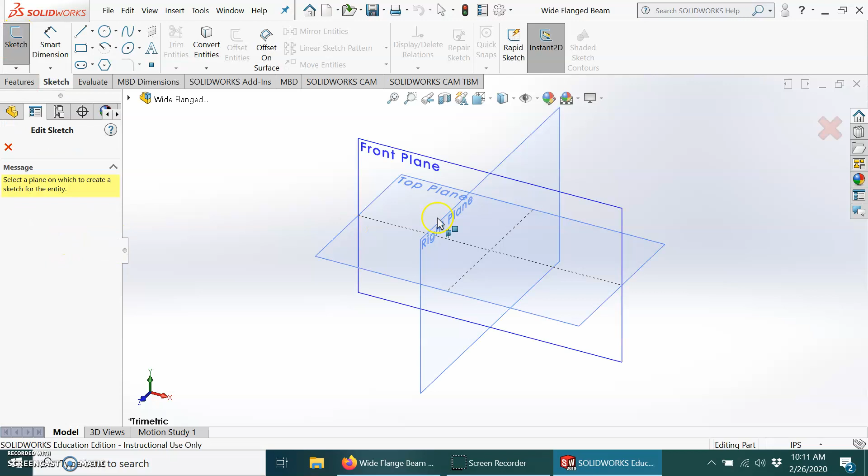I'm going to do this on the front plane. Now, I do want to make it completely symmetrical about everything, the X, Y, and the Z. We'll accomplish the Z by the way that we extrude it out. But since we are centering everything up on the X and the Y, I'm going to use our center lines.

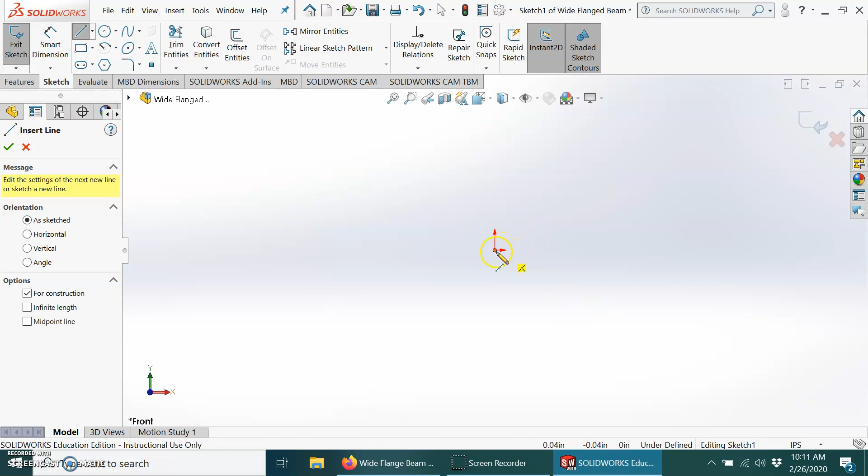I'm going to tag them to the origin. I get my horizontal one there, tag it to the origin, and now I've got a vertical one there. Now you see that I've held up that line to that little yellow vertical appeared, so that would automatically put the relation in, so I don't have to worry about it. So there we go. So we have our center lines, which are construction lines.

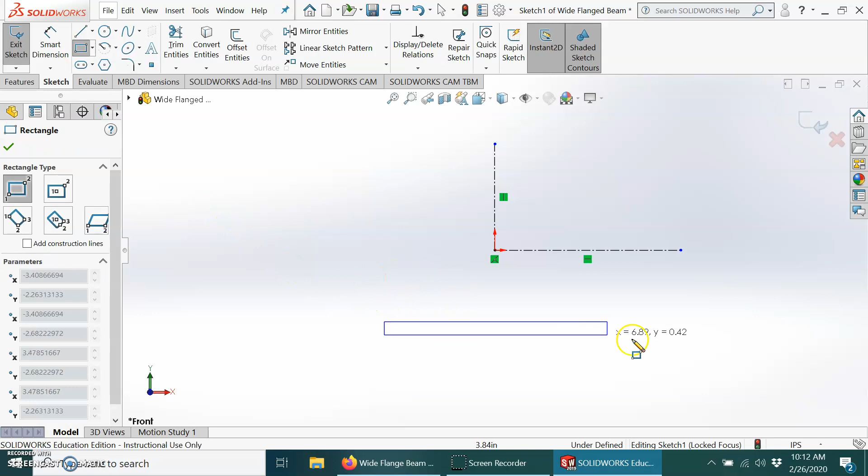So now what I want to do is build my beam. We know what a beam looks like, it's an I-beam. So what I'm going to do is draw 3 rectangles, and then we'll end up putting them together. Now notice I'm not spending too much time to really make it look like what it is, I'm just slapping down some geometry because I know that's kind of what an I-beam looks like.

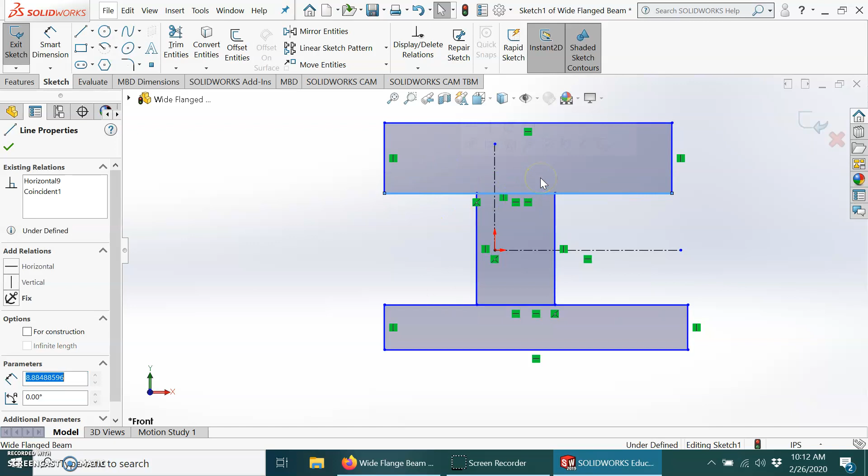From there, we're going to start constraining this guy. But one of the things I do want to do is make this just one cross section through here. So right now everything is tagged together, so it moves around. I do have this line through here. SolidWorks will allow you to extrude multiple sections now, that's not always been the case, but let's just turn this into one section.

The way that we do that is we have trim. Trim allows you to take out lines, trim to closest, trim away from outside. You have a bunch of different options here. I'm just going to go through the power trim, and basically draw a line straight through here, so what I'm doing is cutting this open.

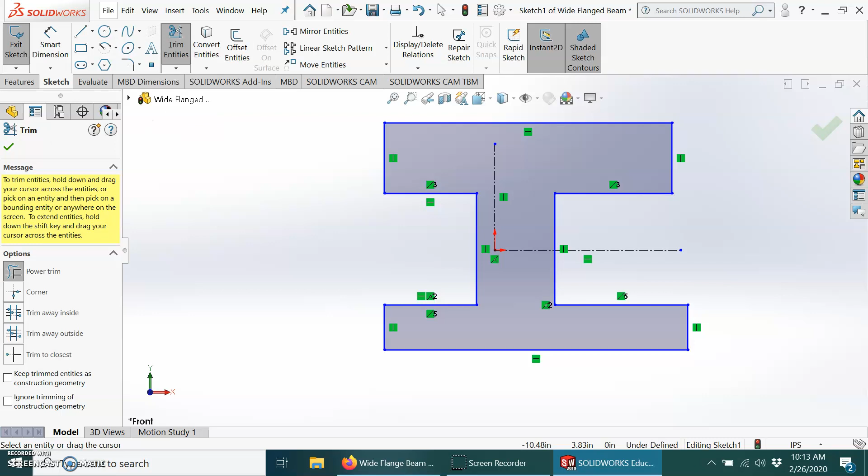Now, did you notice how it went from gray and went to white for a second? That's because I did not have an enclosed cross section, because I still had this little line here. And then when I got rid of that, it went back to gray. That means, okay, well, now I can extrude this because it's a closed section.

So let's start adding some of our constraints here. I'm going to play with one that we had before, and we're going to go right back to symmetry because that's a great one. So I'm going to make things symmetrical about these axes that I drew. As I said, we are going to be using symmetry a lot in this model anyway. Okay, so now everything's symmetrical about those points.

These outside ones need to be symmetrical about the center too. So we're going to pick those lines, pick that, and then make those all symmetrical. Now I could make these ones down here symmetrical about it if we wanted to have a different size beam, but the I-beams, they're going to be the same.

So what I want to do is we're going to take these 2 lines and make those collinear. Notice I got that dashed line in there, all that's doing is saying this is all the same line, we're only using 2 parts of it. And then we'll do the same thing on the other side, make it collinear.

Notice we're doing all of this before I even put dimensions in, because I want to have it set up to where then I can just slap the dimensions on and be done with it.

Okay, so another one that I'm going to put is this line here and this line here. I want them to always remain the same distance from the same thickness. I'm going to put the equal constraint on those, and that's going to make those completely equal.

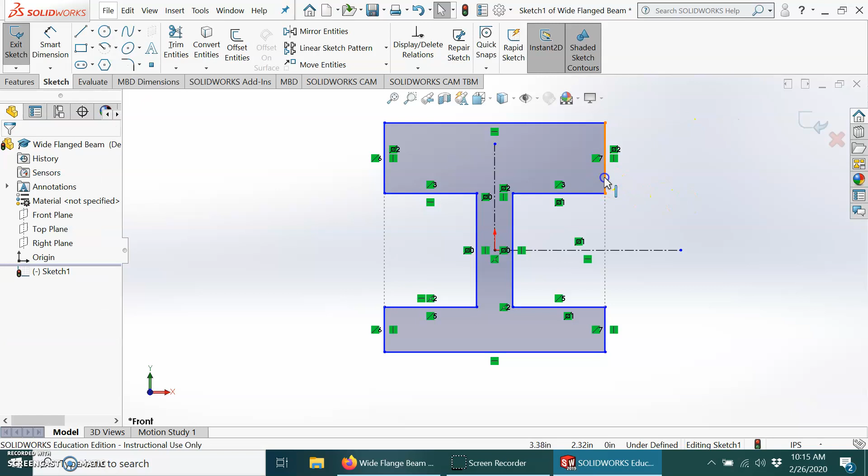Should have changed already. I don't know, do I have that over constrained? Let's go take a look at that. So we've got this line here, this line here.

Oh, I guess I did not click on that. So now I've made those equal, so those will stay the same size. I don't have to do that to these two lines because they're bounded by the collinearities of the other sections.

I believe that is all the constraints we are going to need. Obviously we're still unbounded, so we have to start adding some dimensions into that. Let's take a look, and I've got to look at which beam we're going to make here. We're going to make a W8 by 31.

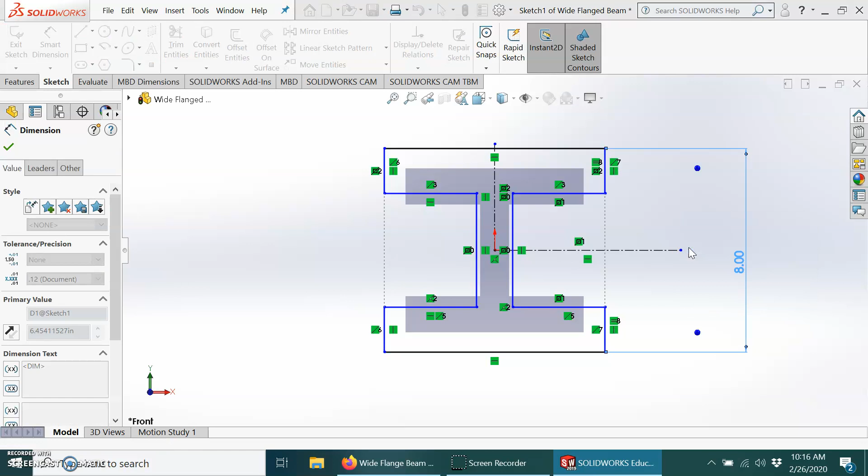So dimension D, which is top to bottom, that needs to be 8 inches. Notice part of it went black because it's fully constrained. So the flange width is 7.995, from here to here.

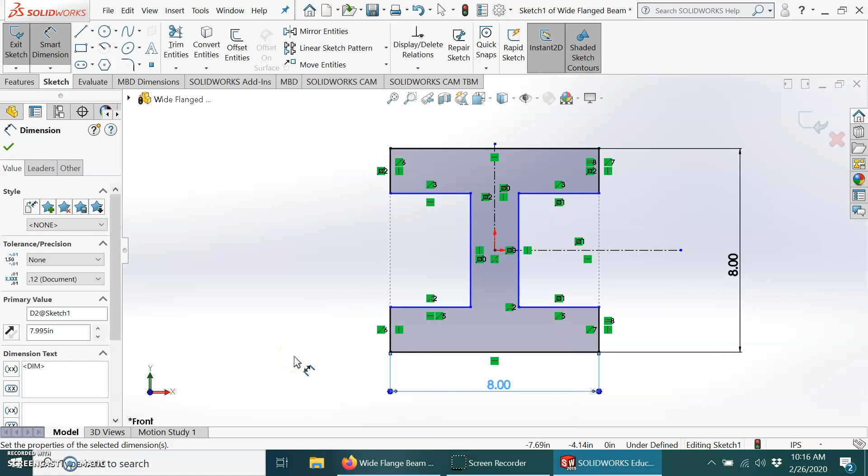It comes up 7.995, and you can see that things are starting to come to shape. Flange thickness is this guy right here. So now we are looking at 0.435.

Notice we've only got one dimension that is not fully constrained, and it's this one here. That would be our web thickness, which is 0.285.

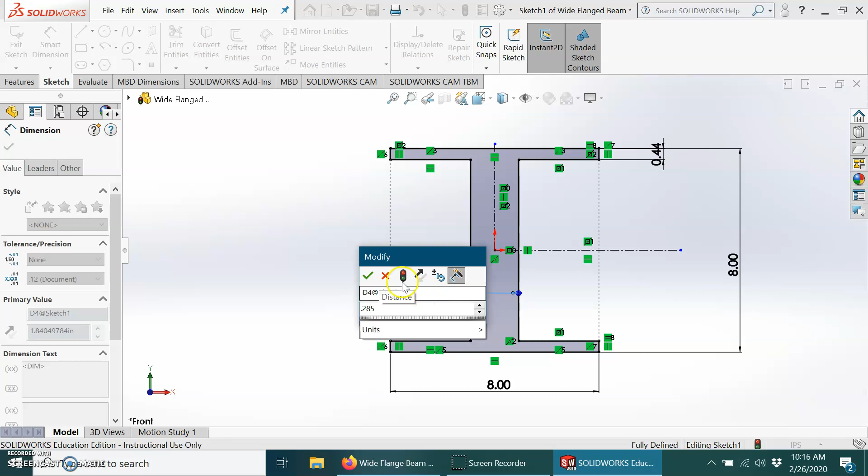So there we go, we have our I-beam there. 4 dimensions completely defines our beam, so everything's taken care of there. And what we need to do now is extrude it.

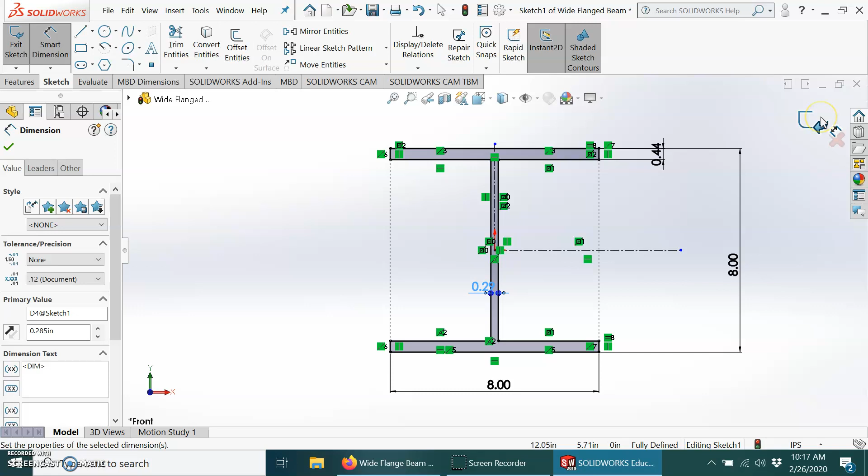Our sketch is done. I'm going to hit here to exit the sketch, complete the sketch. There's our beam. So let's go to features, and we're going to extrude this out. Notice we've only got the one section there. SolidWorks goes, okay, this is the only thing we've got. Now we're going to make it 12 inches deep.

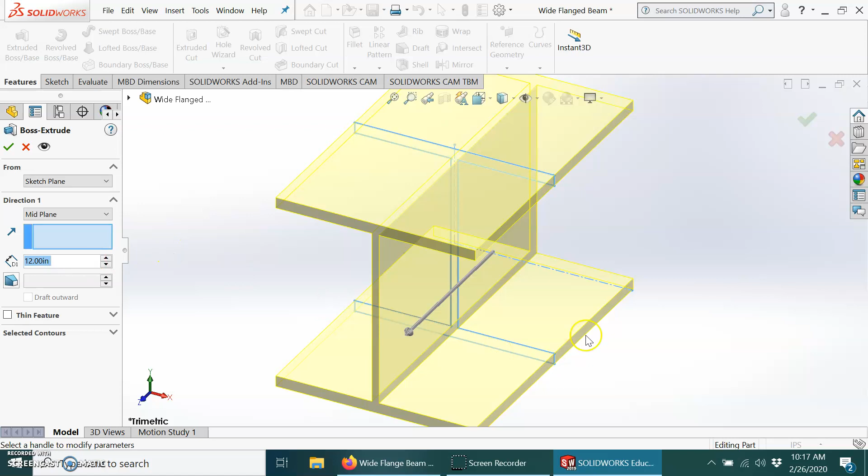As I said, we want to exploit symmetry here. So instead of blind, we're going to do midplane. All midplane does is extrude it out 12 inches, but from the middle, so it's almost like extruding it out 6 inches from each side. You'd get the same effect if you went 6 inches one way and then did a second direction 6 inches the other way, but we're just doing it from the midplane.

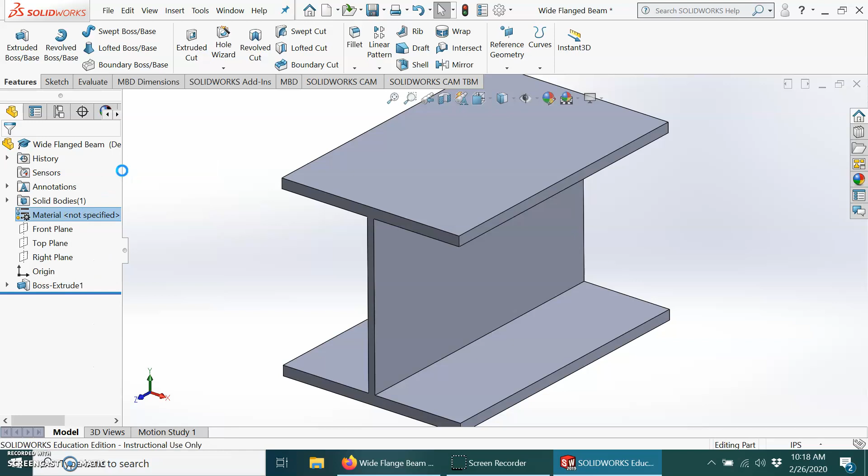There we go, we have a nice, solid I-beam that's all put together. So let's put a material in on it. Edit material, and we want ASTM A36 steel. It's a good one, we use this a lot in strength of materials because it's got easy to work with properties for the equations. And so there we go, I have ASTM A36 steel.

So what I want to do now is take a look at some of the properties. We go over to evaluate, I pull up the mass properties of my beam. So we can look at things like the volume, the mass. It's a 30.59 pound beam. It gives us all of our configuration data here, density, which it pulled from the material guide, surface area, volume—all great stuff, all good things to know.

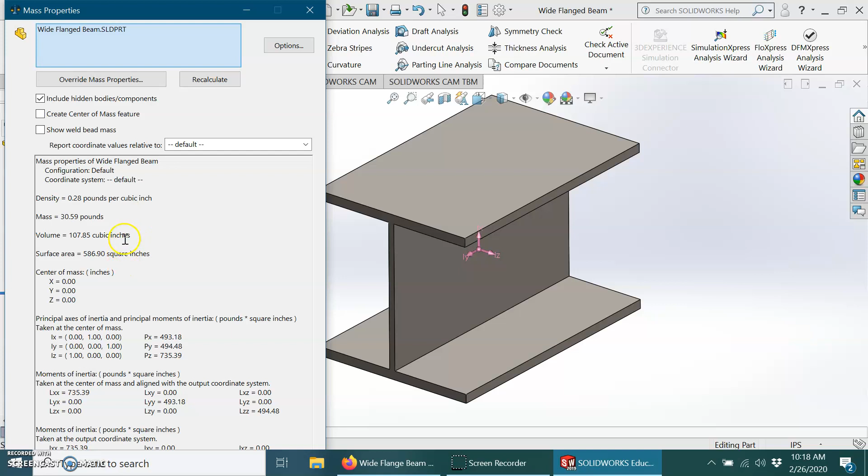So why 4 dimensions? Why do I think that's an important thing? It's easy to modify. As we're using SolidWorks, the thing we always want to remember is we want things as easy to modify as possible, because that's really where the power in this whole 3D modeling system comes out. So when you only have 4 dimensions and everything's set together well, it's easy to calculate out. You can look through this and play around with everything.

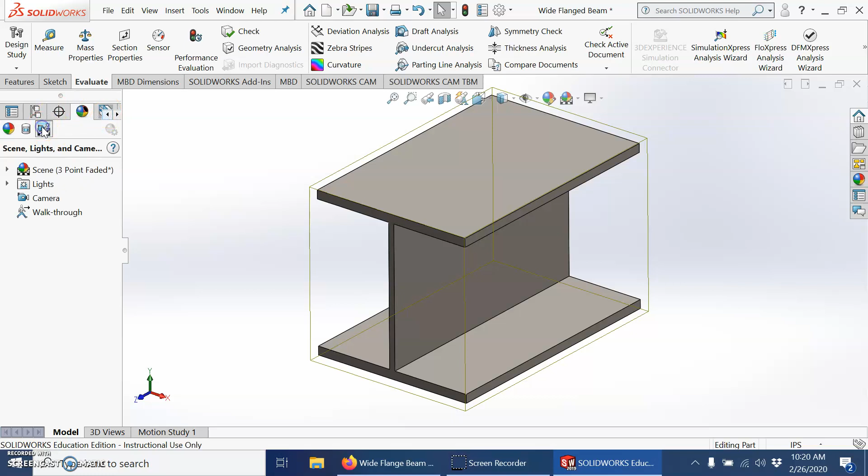You've got your display manager here where you can go into scenes and play around with that. You can play around putting decals on things if you really want. This is all stuff I'd recommend just playing with at some point. You can bring up the manager. What I'm doing right now is applying a matte steel appearance to the part, and unfortunately, with the video card my laptop has, it's not really coming out as pretty as it could, but anyway, that's all stuff to play with.

In another video, we will be using this beam to show you how configurations work.